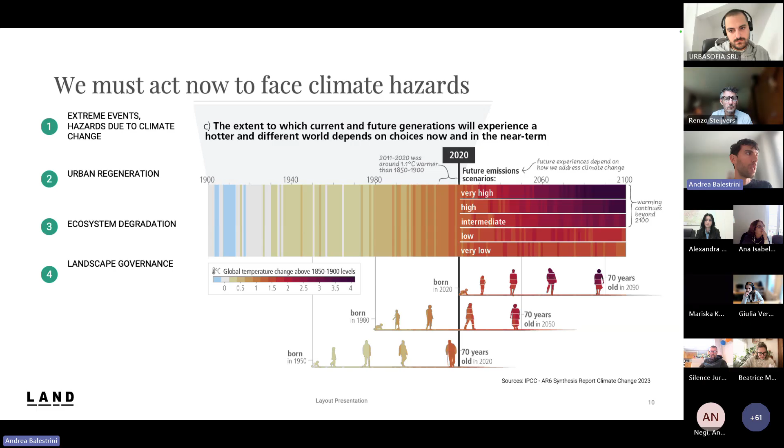It's also a cultural matter. We have seen in the past 5-10 years how society mobilized towards a greater awareness on climate change, on the need of taking action and reintroduce nature in our lives. This must be supported by policies, of course, otherwise it would be a weak positioning.

So, as I mentioned, the World Economic Forum already stressed this topic of nature positive cities and published some guidelines in order to rehabilitate nature in urban areas. However, these recommendations and these international policies must become regulations and local policies.

We know that at European level, the European Commission committed within the European Green Deal, also with other initiatives such as the New European Bauhaus, and within this framework also the, let's say, fight for the Nature Restoration Law that has now finally been approved last year and will require consequent actions in the next decades.

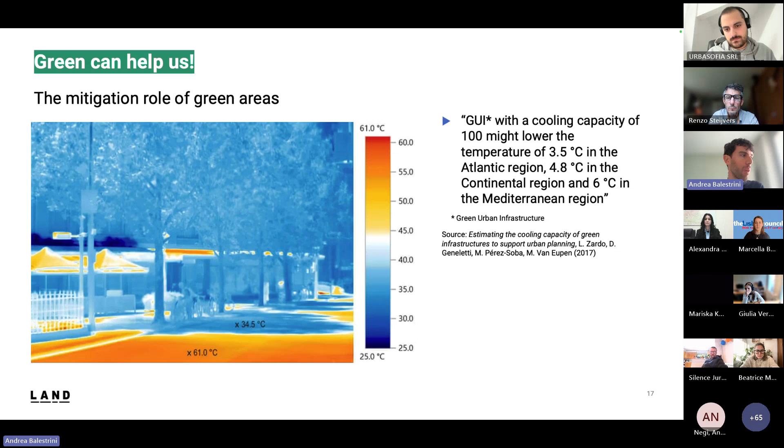Green can help us, it's a great ally in doing that, because several scientific studies, and I think this public is quite aware of them, have been demonstrating in the past 20 years how nature-based solutions, how green areas contribute to reducing temperature, improving urban drainage, improving air quality, and so on.

What is important to take into consideration is how the design process of nature-based solutions shall occur. So the starting point is the engagement of stakeholders and the assessment of the local environment, in order then to start a co-creation process, and then also a co-implementation, and finally a co-management.

So the participation of stakeholders is a key component in order to ensure efficient nature-based solutions, but also sustainable in terms of economic backing, in terms of maintenance, in terms of technical contribution by other partners in each context.

Also, the topic of monitoring is quite important, not only to contribute to building knowledge about nature-based solutions, but also in order to adapt the design, in order to control how the design and then the implemented design is working in the specific area of intervention.

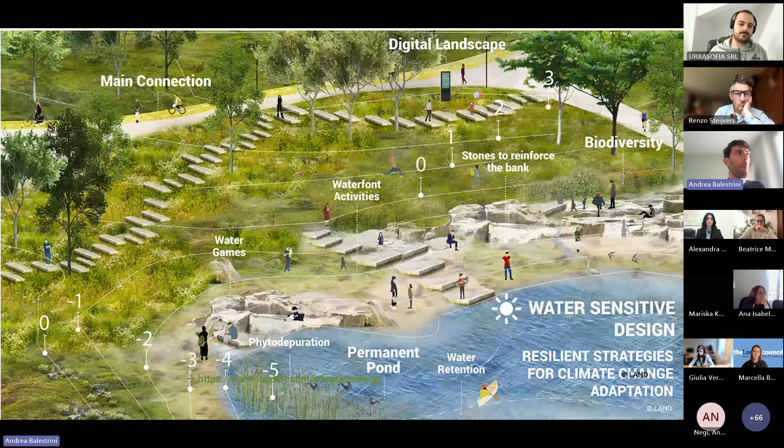Prototype in the sense that sometimes it is a good idea to start implementing small pilots in order to test them and then upscale and replicate them on a bigger scale. The monitoring is a great ally of prototyping, so that through the monitoring outcomes, the upscaling is quite more effective. And so then combine all the components in order to design multifunctional green areas and thriving ecosystems that are adapting to the challenges of climate change.

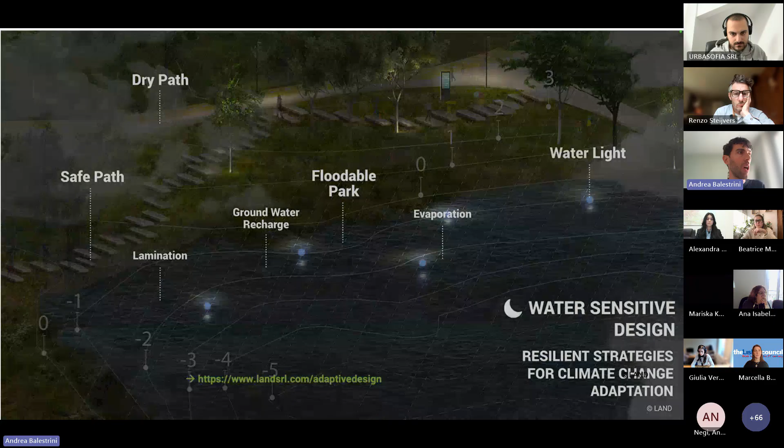Here are some examples in the projects that Land had the opportunity to develop in the last 35 years. For example, North Park in Milan was a quite extensive brownfield, and through several afforestation interventions and other, let's say, nature-based solutions ante litteram, we had the opportunity to turn this area into a metropolitan park, one of the most interesting peri-urban parks in the Italian context, or this former quarry in the Alpine valley of Valtellina that was turned into a new urban park, deploying several NBS such as ponds, afforestation actions, and draining paths.

Or again, on the Ligurian Riviera, a former railway that was turned into a bike lane with the linear park all along it.

Here we are in Germany, in the Ruhr area, one of the most important industrial basins in Europe. After the closure of heavy industry in the 90s, we had the opportunity between 2006 and 2012 to work on this huge project, turning the former dump and factory of ThyssenKrupp steel company into a new office headquarters and an urban park that is managing several issues such as rainwater and the excavation soils from the construction site. Here you see how, thanks to green areas, we were able to design some bioswales, some hills, some afforestation areas, playgrounds, everything connected into a quite systemic cycle.

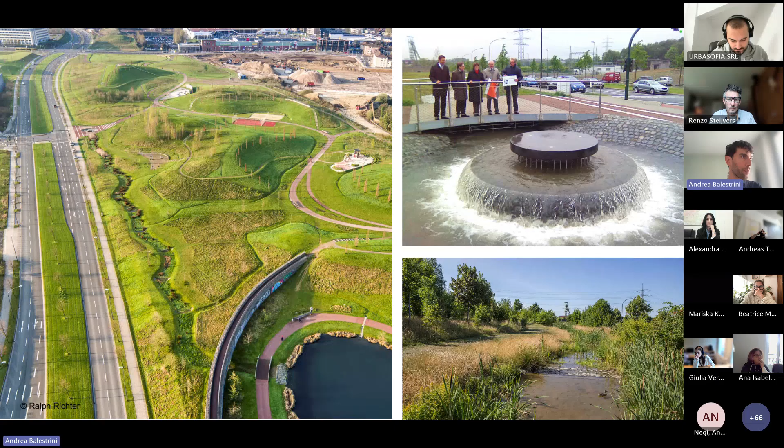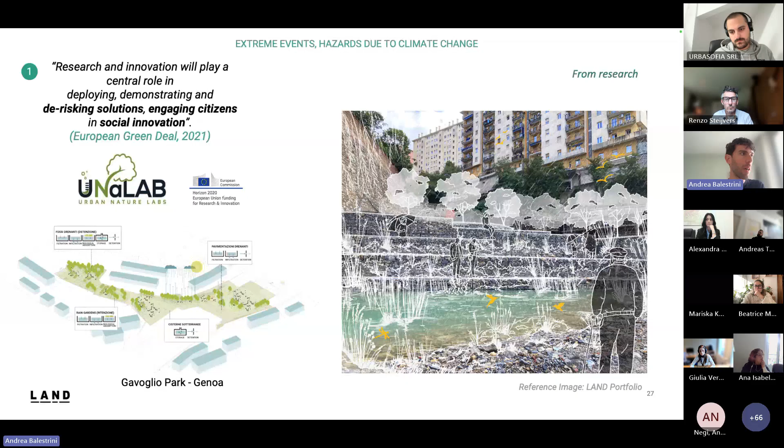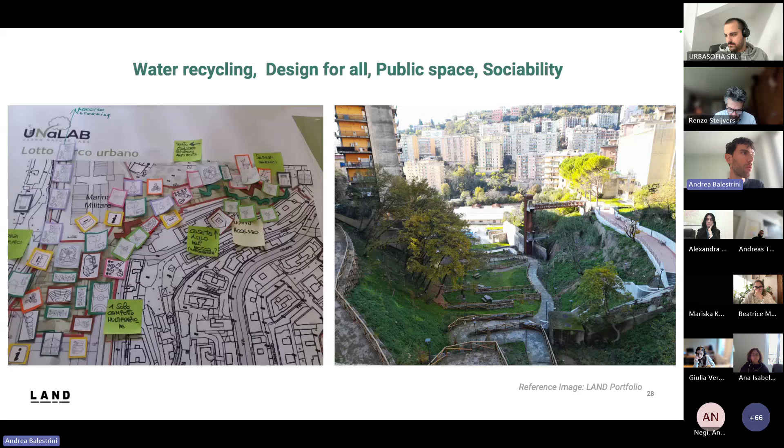In Genova, that is again in the region of Liguria, we had the opportunity to be partner of a Horizon Action from 2017 to 2022, UNALAB. Within UNALAB, we turned a 1.5 hectare former military barrack into an urban park. We demolished 5 buildings in the area, and we unsealed as much as possible. There was a co-creation process, and through the co-creation process, we were able to place functions that are vital for the neighborhood. And then, on the other hand, we had the challenges coming from the peculiarity of the site, so very steep, very sealed in general, with a lot of rocks underneath. But the final result was a first attempt also to introduce a nature-based solution in such a harsh Mediterranean context.

Another project is in the metropolitan area of Milan, in the northern part of it, that is one of the most urbanized areas in Italy, suffering severe flooding when there are heavy rain events. And here, working together with the local water facility, we were able to turn the initial project of a contention basin made of concrete into an urban park, almost avoiding the use of concrete and other artificial materials. So in this case, you see it's a depression that is collecting rainwater. It can be used as an urban park when it's not raining, and when it's raining, it becomes a huge pond.

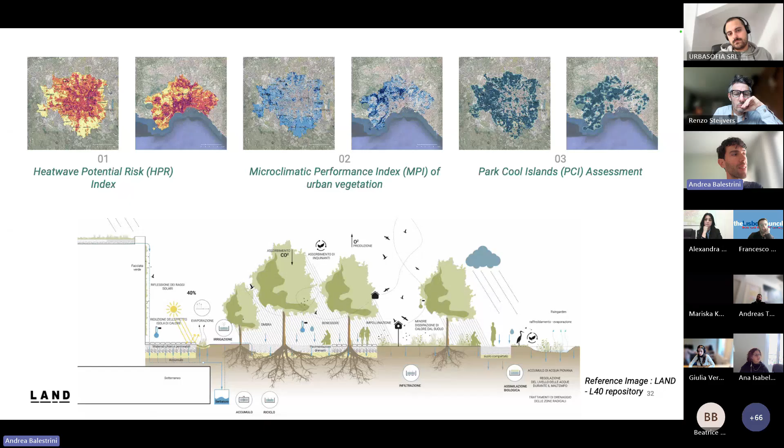Another European action where we were able to improve the knowledge of the benefits of nature-based solutions was Urbalytics, that was funded by the AI for Copernicus Horizon project. We partnered with Latitudo 40, and we developed a methodology to assess urban climate risk through the analysis of Copernicus satellite images. You see the results on the top of the slide. So there are three main outputs that are tools in order to assess the heatwave potential risk, the microclimatic performance index, and the Park-Cool Island assessment. And this was intended to assess which nature-based solutions were able to improve the conditions in two pilot areas in Milan and Naples, so two very different climates and urban situations.

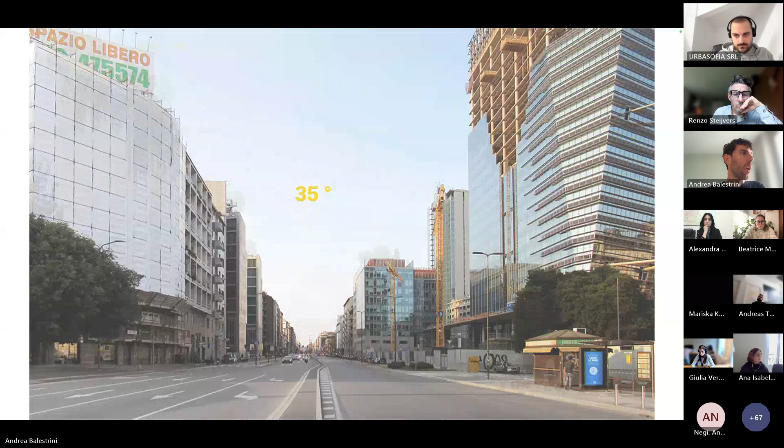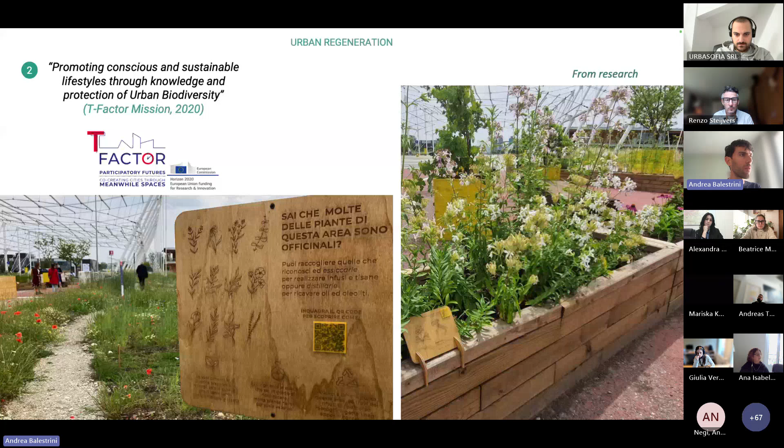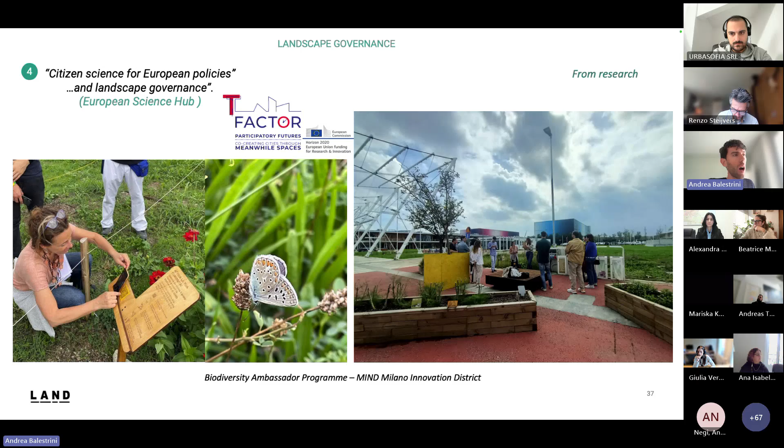So nature-based solutions can also be a great intervention at small scale. We had experience of that within another Horizon 2020 project called T-Factor that worked on meanwhile spaces. Again, in Milan, we were able in a very wide urban regeneration area to introduce nature-based solutions as a booster for a dialogue with different institutions and to involve external stakeholders that were not included in the urban regeneration projects, such as schools. Here we realized very tiny solutions, so basically some planters and some natural meadows with a QR code that informed the participants, but also the employees of the companies already established in the area, how local biodiversity had an impact on their everyday life.

So this was also an attempt to introduce citizen science into the monitoring of nature-based solutions. And together with Politecnico di Milano, we developed a quite interesting website within the project website where we published a bestiarium and herbarium, two catalogs of herbs and animals that are living in the area.

The role of non-humans or more than humans is very important in the design of NBS. This is something that came out in the last 5 years rather than when NBS were first conceived in 2015. In several projects, the partners are really pushing for including animals and other more-than-human characters into the design and the implementation of green areas.

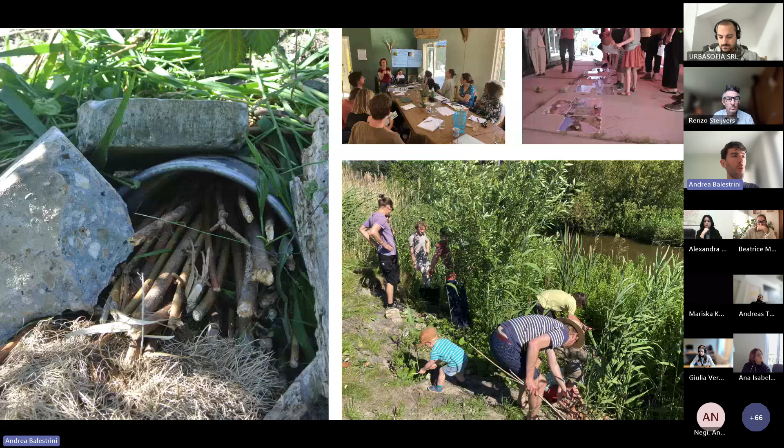Here you see some examples of how we developed some animal-oriented solutions in a park in Amsterdam. They are very tiny interventions that, however, were able to engage also some citizens in the making. And this is the final result, how in the urban regeneration area tiny prototypes can then become established and long-lasting solutions.

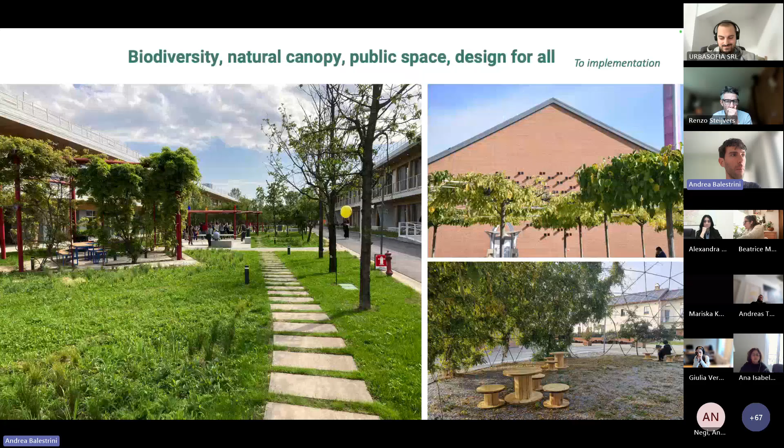Unsealing is another very important topic for European cities where we can orient towards nature-based solutions. This is another case study in Italy, in the city of Vercelli, in the north of Italy, not far from Turin. You see there was this very long alley in the center of the city with many trees. However, they were all belonging to the same species. They are ulmus, and most of the surface was sealed, with several inconveniences during summer or during heavy rain episodes.

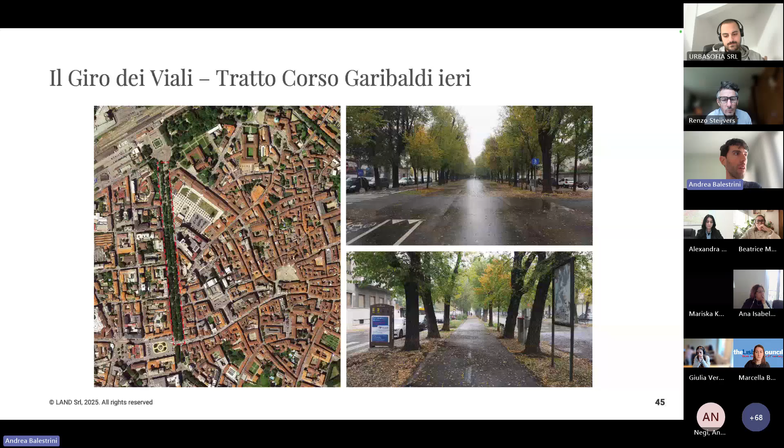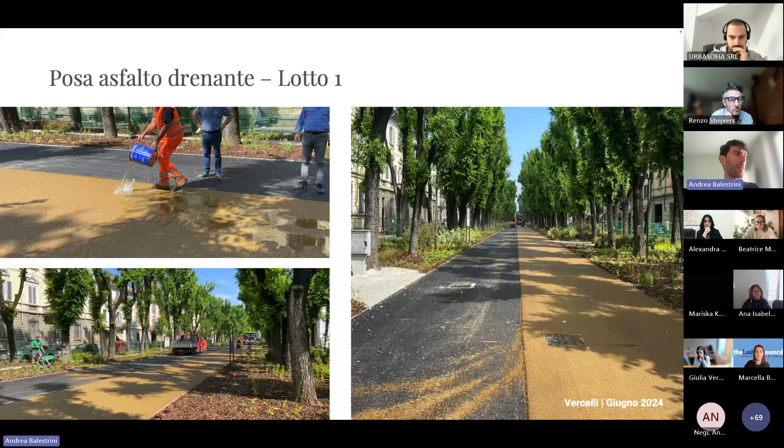Here we established a fruitful dialogue with the local public administration, and we managed to propose a design based on green instead of asphalt. So the asphalt surface has been reduced and a draining pavement has been established in replacement of that. On the other hand, new trees with more species have been planted, and also shrubs and herbs, in order to improve biodiversity and draining conditions.

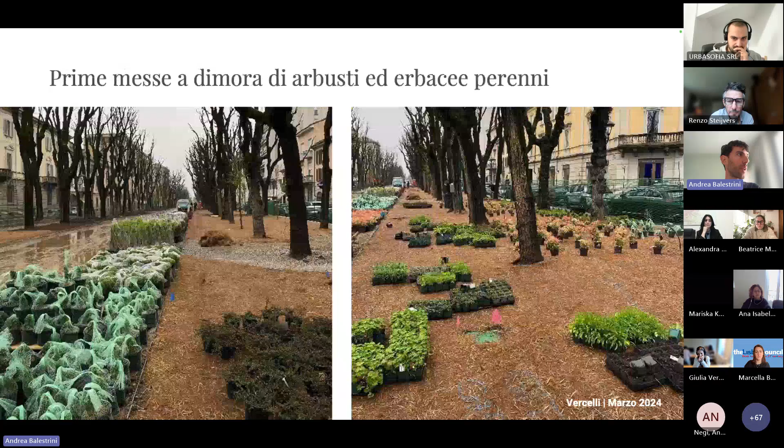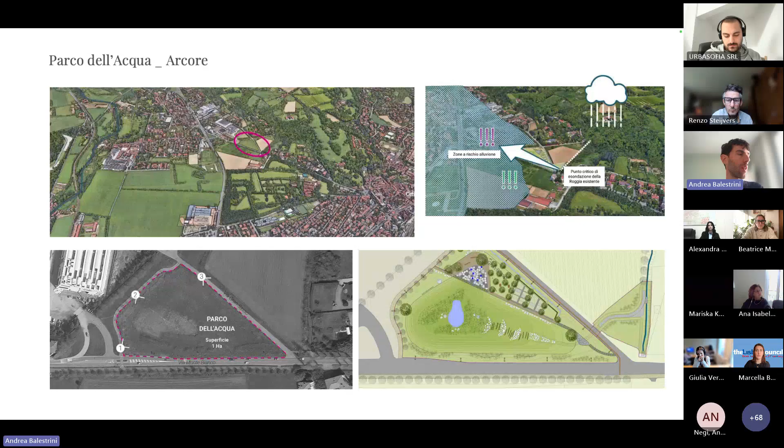And finally, I will talk to you about the pilot that we are developing within the GreenInCities project. There will be also another partner, Jose Miguel, that will talk in this panel. We are in the city of Prato, in Tuscany, a quite dense urban core and a very scattered urban fabric all around with several industrial and residential neighborhoods. Through the tools that we improved within GreenInCities, we were able to run an assessment of climate challenges, of biodiversity and vulnerable groups in the city.

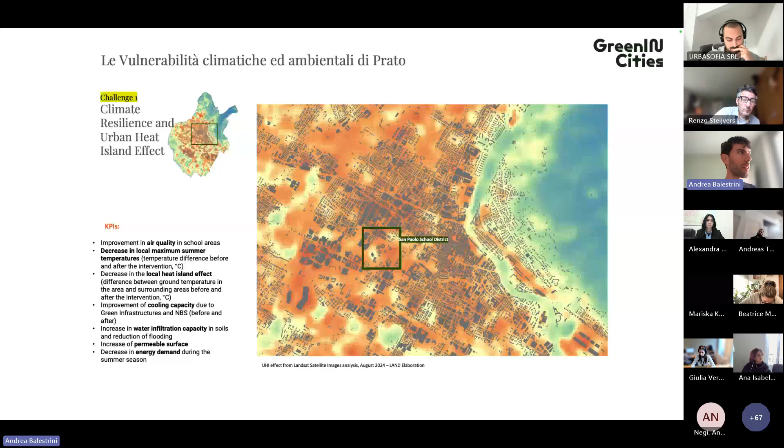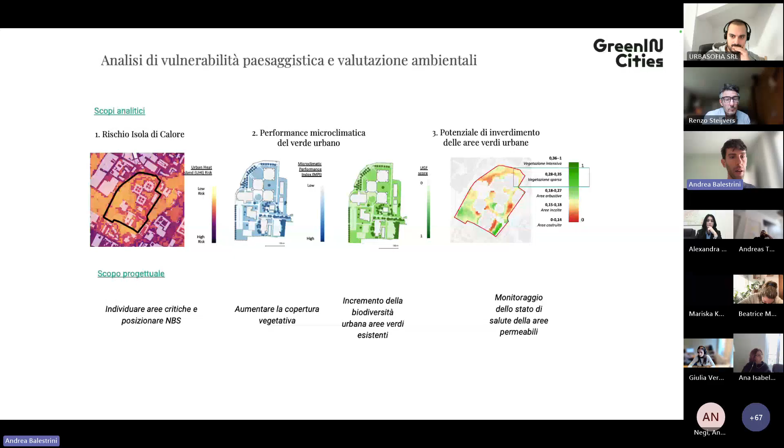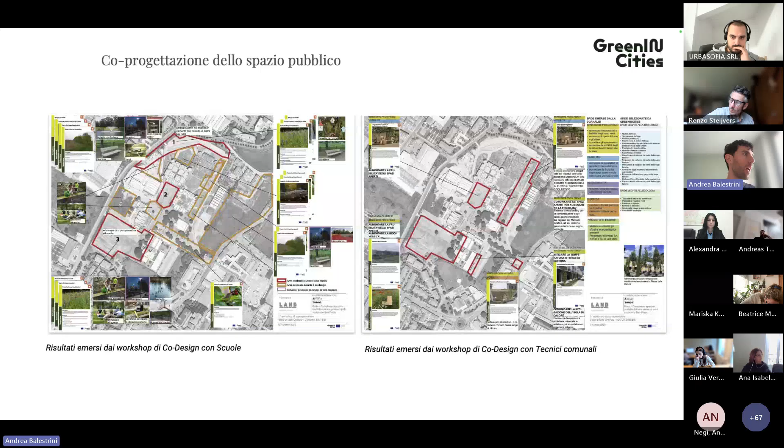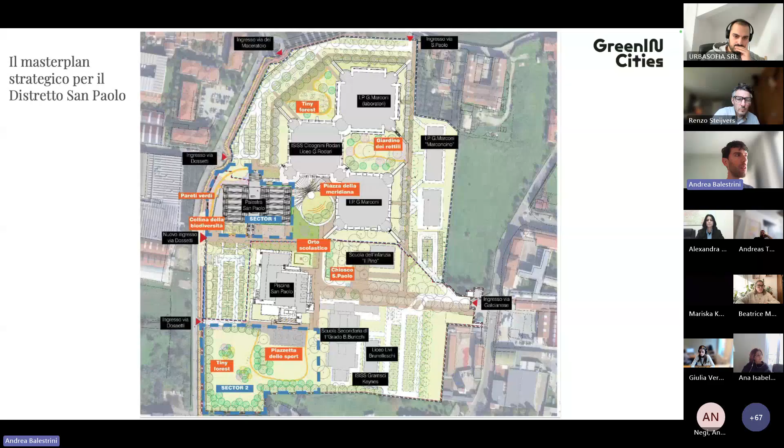And we identified with the local administration this school district called San Paolo, where most of the challenges are more significant. Here you see the same tools applied at local level in order to identify which are the areas that are more vulnerable and which are the components that we must address in the landscape design. We did a co-analysis and co-design process with the pupils in the schools and the teachers. And the outcome of the co-creation was this master plan for the entire school compound, where we focus on two specific lots of intervention, the blue ones, that are currently under design.

We are expected to deliver the technical design at the end of the month, so that in springtime the construction will start. In general, just to give you an overview of the nature-based solutions introduced, we are working on flower meadows for pollinators. We are improving the condition of an existing sport building that has just been realized. However, in the hill next to it and the green areas all around, there is just grass at the moment. So the idea is to improve the tree canopy and also to work on green facades.

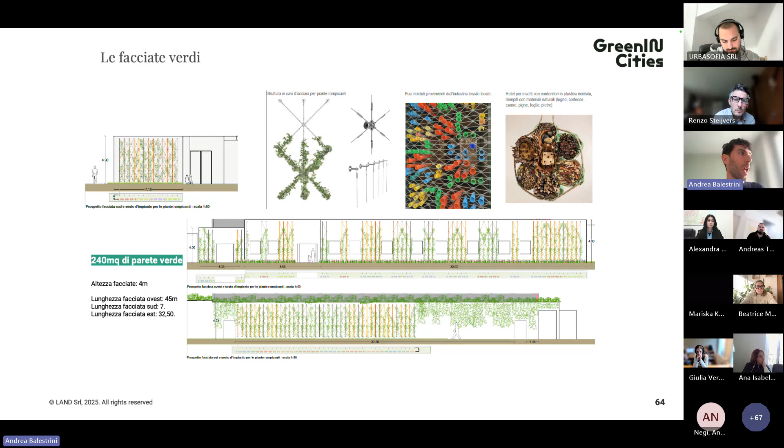However, we are not working with technological facades, instead with ground-based facades, including some reused materials from the textile industry to create opportunities for insects and other small fauna to nest and to feed. These green walls will also mitigate the quite rough concrete walls of the sports center, and will be combined with the other lot where we will design some tiny forests and some wild buffer zones in order to improve the green corridors existing in the area.

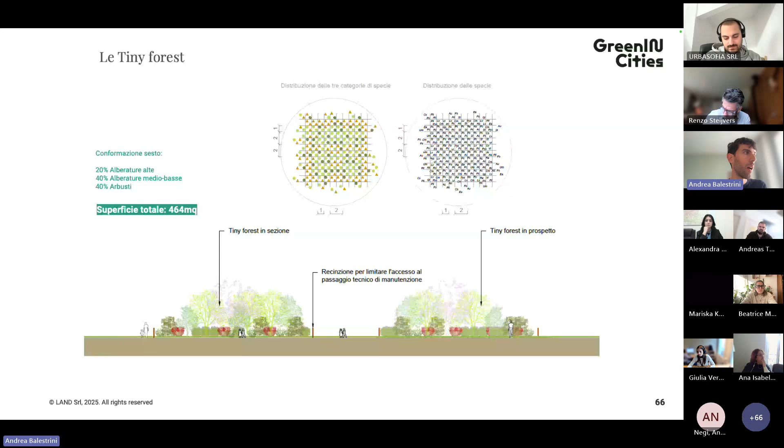We have been in touch with another Italian university, that is La Sapienza in Rome, because they have developed other tiny forests in Mediterranean contexts in Italy. So we are able to adapt this concept that is coming from the Miyawaki method from Japan also to our climate. And of course, our main concern at the moment is how we are addressing the needs of more than humans in our interventions. We are working quite deeply in the project in order to have them included in the design.

That's all. I just wanted to close with this picture of an installation we did for the Triennale in Milan, which I think somehow recalls the name of URBREATH, because here it was "let's break it up in order to breathe." And so I leave you with this image.

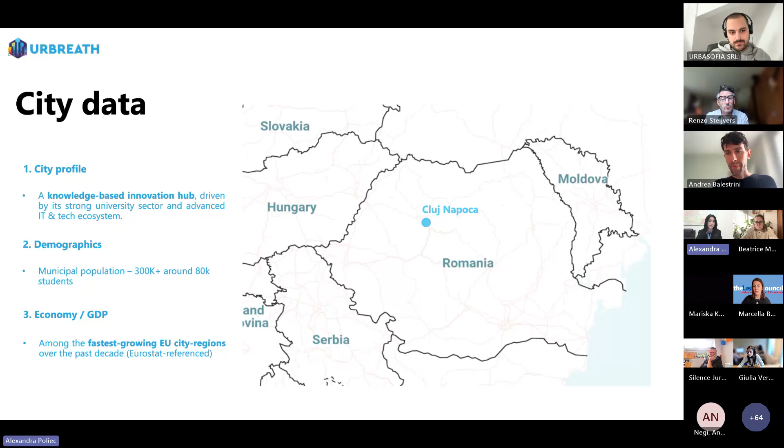Cluj-Napoca has over 300,000 residents and more than 80,000 students. It's one of the fastest growing city regions in the European Union, and it's known for its strong knowledge base and innovative tech ecosystem. Our city is in a valley between the hills. The Someș River is our main ecological axis, with several green patches and transversal corridors linking the river to the forest, to the towns and other natural areas.

Our vision is to be green, digital, and resilient, and for that we work really hard. For all the work that we do, we were among the first 10 cities in the EU to be awarded the EU Mission Label, under the 100 climate neutral and smart cities initiative. Our international competitions have become a key tool for delivering high-quality spaces in Cluj-Napoca. They ensure transparency, strong participation, and most importantly, the best idea wins, not the cheapest offer, in line with the national public procurement rules.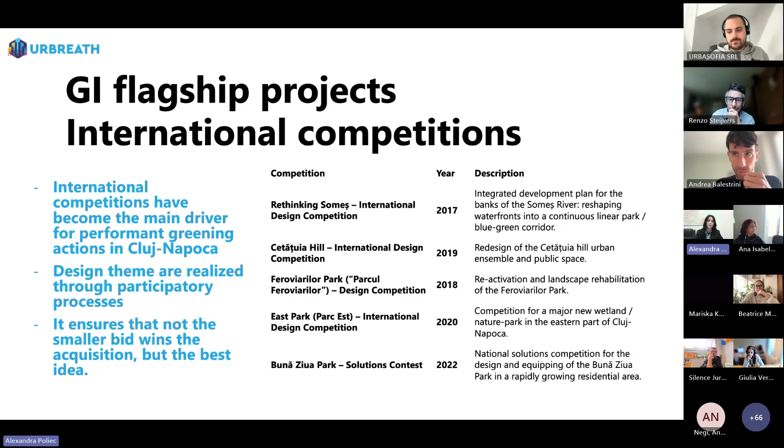One of the best examples is the Rethinking Someș project, which recently won the gold prize at the Madrid Architecture Awards 2025. The concept focuses on turning the city back toward the river and creating high-quality public and ecological spaces along the water. Another great example is the Feroviarilor Park. It complements the investment in multifunctional green spaces and strengthens the green-blue corridor along the Someș River. It shows how large green spaces can reconnect communities and improve ecological continuity. Here you can also find examples of nature-based solutions such as rainwater management and many others. Here are some pictures.

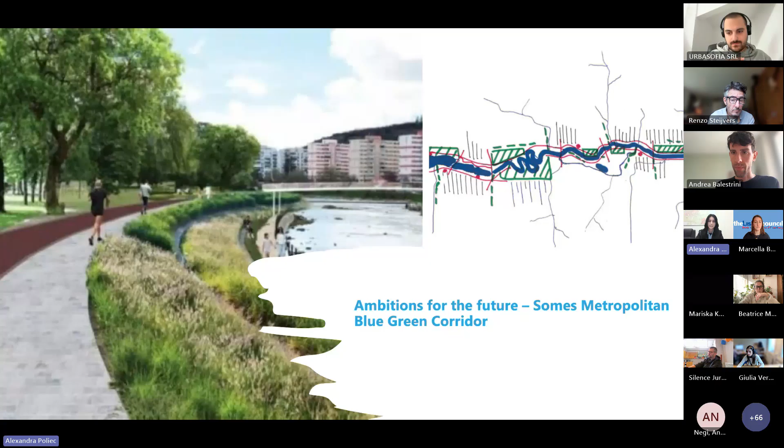Our long-term ambition is to develop a metropolitan blue-green corridor along the entire Someș River. The vision integrates nature-based solutions, flood mitigation, biodiversity restoration, and accessibility to public spaces at the metropolitan scale. We also have a big project, the East Park, one of the largest green infrastructure projects in the city. It covers over 45 hectares of wetlands, lakes, and former nursery land. The project aims to protect biodiversity while creating accessible and recreational spaces.

Another project is the Primăverii Park. It's a neighborhood scale investment in Mănăștur. The park is being expanded and modernized. The redesign includes new trees, green areas, urban furniture, and improved mobility access. It's a clear example of how small parks can greatly improve the quality of life locally.

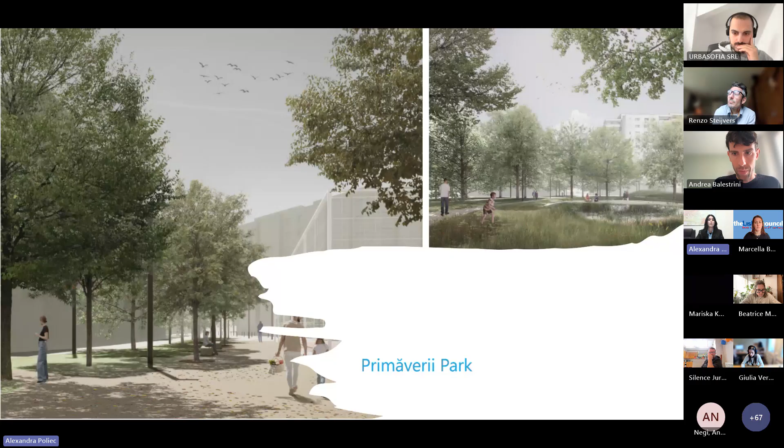And beside all of these major projects, small-scale actions are equally important. They address local needs, are quicker to implement, and often rely on participation or partnership. They also help maintain everyday green quality across the city. Some examples include the Adopt a Green Space program, active since 2012, the former Tree for Every Newborn initiative, and also what we do right now in the URBREATH journey, which transforms degraded microsites using a small budget but strong community involvement. Codruț, the floor is yours.

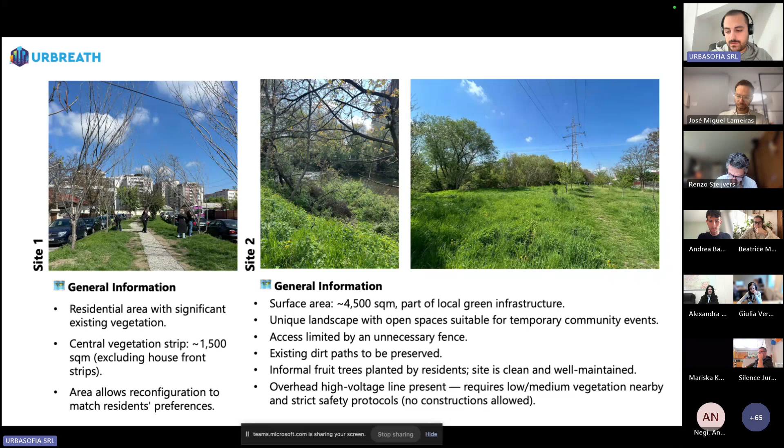And site 4 is near the river, but across the river bank, which is a steep slope which resulted from the systematization of the river and the flood protection measures that were taken back when the city developed some years ago.

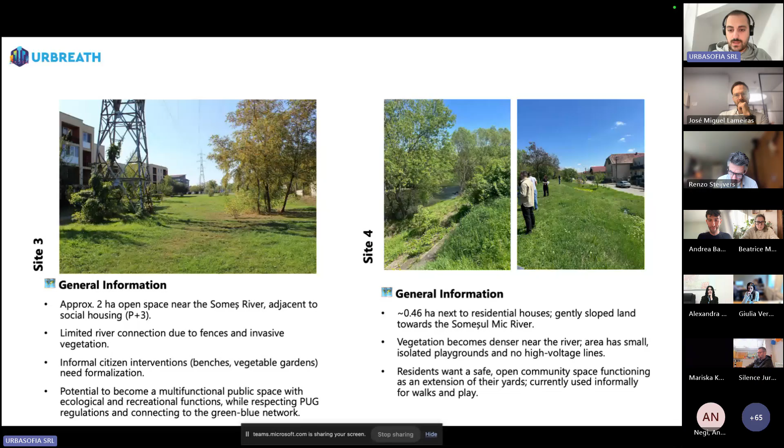So how do we start? In January 2025 with consultation sessions and workshops. We had in January two discussions in the two neighborhoods, Iris neighborhood and Someșa neighborhood, with all types of actors, residents, NGOs, as you see here, for part of our consultation.

And it is very funny that this dog was present because we found out that actually animals are relevant actors in the area, that beavers are making a comeback in the city landscape in this corridor. So we realized more than before that the Someș River and our sites also act as an ecological corridor, and it's very relevant how we interact with this space and this landscape.

Furthermore, in April, we organized a two-week workshop with a group of volunteers and students from the agricultural faculty from the local university with the landscape department. We had spontaneous discussions with the residents. We did the site analysis, we did observations, we did thermal mapping, and with all of this information, we worked very closely with the students in order to develop conceptual plans, concept ideas.

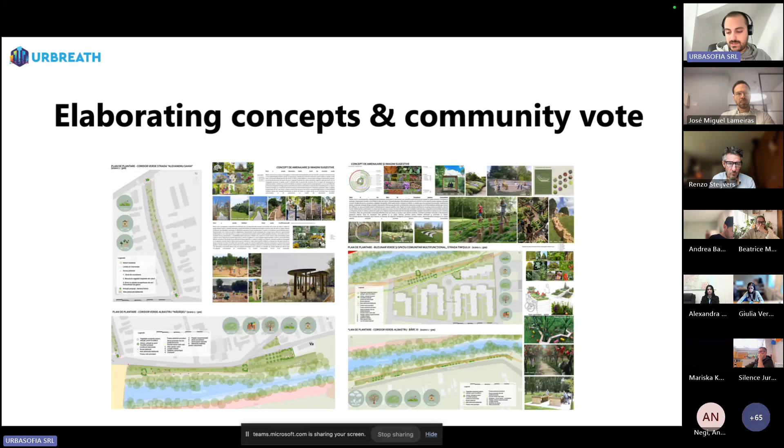And there were three teams elaborating ideas for each of the four sites. So we had 12 solutions in the end, and these solutions were put to a vote by the community. They were displayed in a public area, in Armatura Park, and then also in a different area.

I don't remember now, Alexandra, the second display, where was it?

However, we gathered more than 300 votes. And with the winning team, we started over summer 2025 to work with them on the technical design plans. So we did this process to be a sort of mutual learning process, and we consider the students that work with us a very core group of people that we want to involve also in future actions.

It would maybe be easier just to take their ideas and do the technical design plans by ourselves, but we took the opportunity of working together, and they had a lot to learn about how to deal with a real project because they were still students, 3rd year or 4th year, or even younger. And we also did a lot of learning ourselves because they know the city quite well. Some of the students actually live in the area, and we had a back and forth of ideas and technical requirements and our constraints, which were financial, to deliver the final plans.

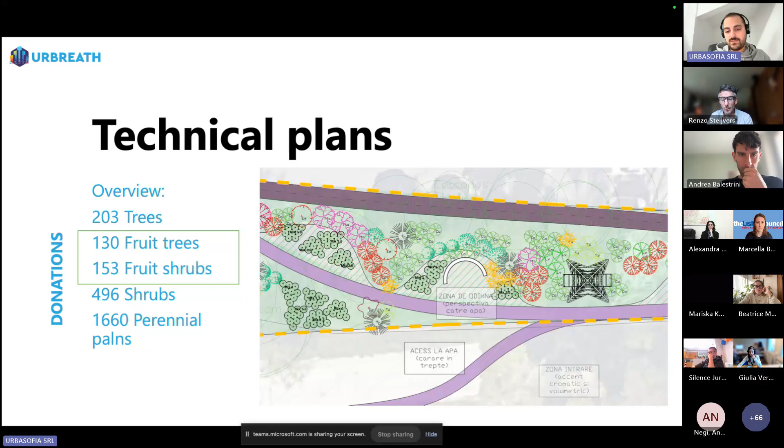And these are the list of quantities, to put it simply: 203 trees, fruit trees, fruit shrubs, a lot of shrubs and perennial plants, because like I said, the height of the vegetation is under constraint because of the electrical line.

The Site 1 transformation vision is somewhere along these lines, to act as a green buffer with dense vegetation, a sort of microforest. We also dabbled a bit with the Miyawaki idea, like Andrea presented before, but not quite, because the morphology of the terrain doesn't allow it. But we want to bring taller vegetation here because it's one of the few sites that allow taller vegetation, alongside pollinator-friendly vegetation in these shrubs and grasses, which helps to create separation between the traffic lanes and the pedestrians.

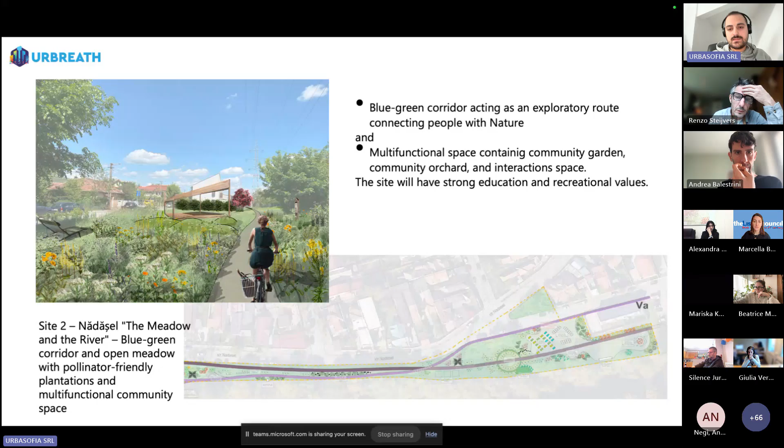The second site acts more as an exploratory route and a multifunctional public space with areas with strong natural ambiances and also places for a community garden and community orchard. The third area is a more multifunctional space. As you see here in this plan, I don't know if you see it very well, we kept the openness of the site alive. It's one of the main features of this meadow.

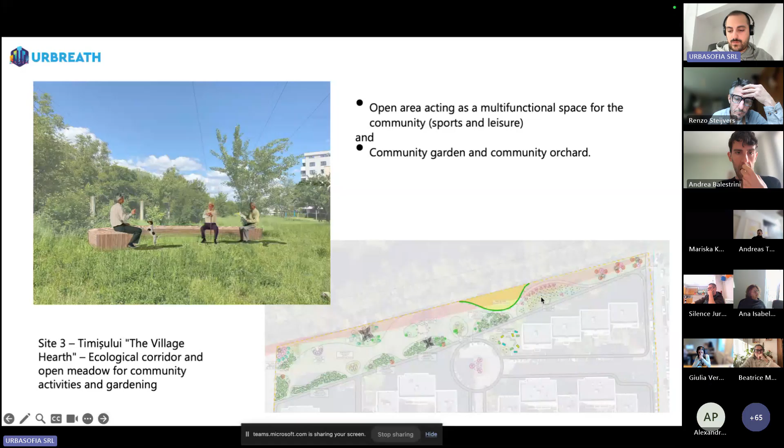And we activated some areas with pollinator-friendly plantations and perennial plants in order to bring color, to support biodiversity, and improve the local landscape. And as community activities, we allow for interaction spaces, open area for sports, but also community orchards and community gardens, like two small areas here.

And the fourth one becomes this green corridor, this sloped terrain, an area for play and socializing, but we also bring here some tall vegetation where we can, in order to complete the canopy that appears on the other side of the riverbank to have continuity, and also fruit trees.

It was a very nice event with huge participation, and we think that it's a good starting point to bring value to the space before we start implementing. And in terms of URBREATH, there are many technical elements and digital elements that we will pilot through this project, like participation and sensors. We installed the air quality sensors in the proximity of the sites and different urbanistic analysis.

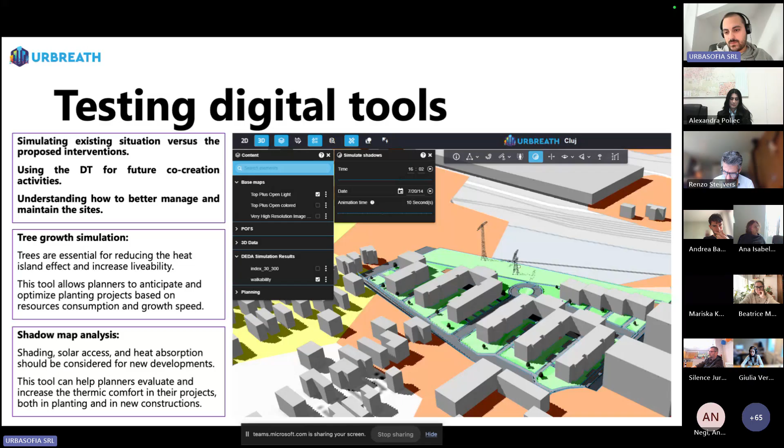I put here only an extract of the digital tools of the digital twin, because we believe it can make a relevant case of analyzing the existing situation and the proposed situation. So with the proposed vegetation, to make some simulation of the tree growth, of the shadow map analysis, maybe also in the future of the water requirements, in order to better understand how to manage the sites, and also to improve participatory processes, showcasing the residents how the site will become before we start implementing and show how it will evolve. Yeah, and I think that that is all from us.

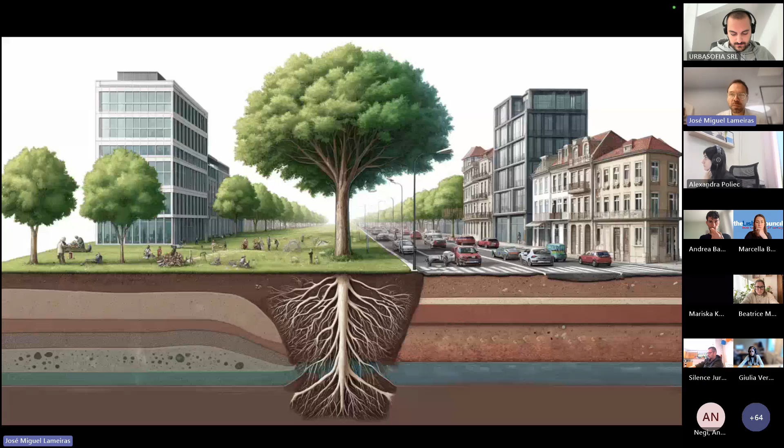Most people don't know that the biggest reservoir of drinkable water are not the lakes, are not the rivers, it's the ground. The ground stores the water that we need to live, but most importantly, it also stores the water that the trees need to evapotranspirate and to effectively cool down the city. It's very important that we think of a tree, that we understand what is a tree, and that most part of the tree is what's hidden. And we also know that in the cities, whenever it rains, most of the water in the permeable areas goes and recharges the water tables.

One of my biggest advocacy in the last years is to actually make sure that our cities have healthy water tables. The water tables in the city of Porto, they're lowering at an alarming rate of 1 meter per year. This means that the city is getting more impervious, and because the city is getting more impervious, the water tables are getting lower, and the water is not going up through capillarity, it's not reaching the roots, and it's not being evapotranspirated into the air.

And it's this evapotranspiration of water that creates this thin layer of moisture that can actually act as a thermal inertia and effectively cools down the city. This is the reason why in many European cities, and I speak in particular of Coimbra and Barcelona, you now have areas of the city that have trees where the thermal behavior is the same as pavement.

This is extremely alarming, because if the trees don't have enough water, the trees are extremely smart, they close their stomata and they protect themselves. And they protect themselves by closing the stomata and not evapotranspirating. And if they don't evapotranspirate, they don't cool down the city.

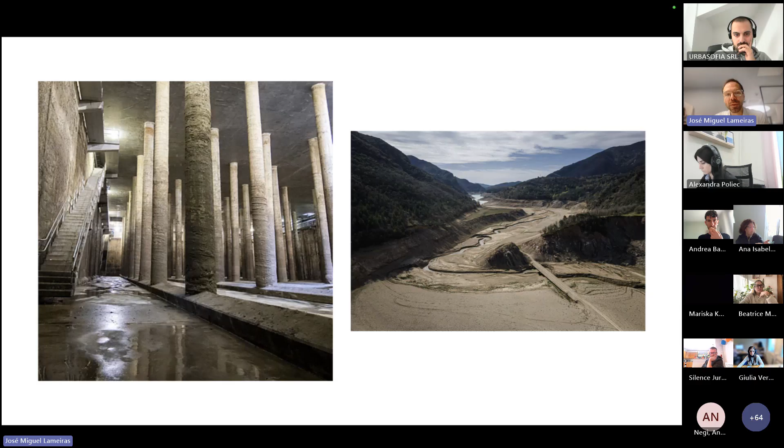and the lakes and dams without water. But most concerningly, the part that I'm extremely concerned about is this: the urban parks that are getting dry, the trees that are still dying today because of low water tables, and what used to be meadows and lawns are turning into pavement because the soil without ground cover just erodes and quickly transitions into this pre-desert landscape.

These are the kind of solutions that we can implement where we guide the water on the surface, both by the paved areas and the green areas, towards water infiltration areas that basically act as a piston. They retain the water, they infiltrate the water, they push the water into the ground and they recharge the aquifers. This is extremely important. It's dependent on the geology. Porto sits on granites. It takes longer for the water to infiltrate, which means that we really need to do this to assure the resilience of the city.

This is a very important work that we did 15 years ago, where we mapped the green structure of the city. This allowed us to make a diagnostic on the areas that lacked green spaces, like the center of the city, the areas that had quite interesting green structure, and we also thought about how to make connections, how to make linkages, and how to link society and urban design with green spaces.

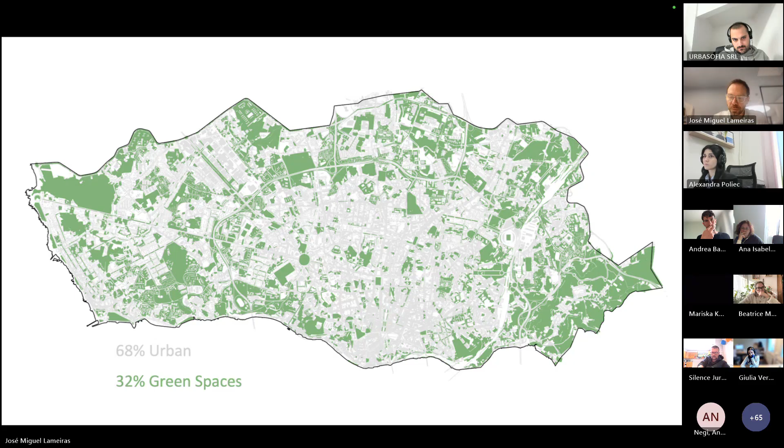This would be the map of the city. And yes, 24% of the city are buildings, 32% are urban green spaces, but look at the name and the number in the middle. 44% of the city is devoted to the car, roads, paved surfaces. Of course, we also have the sidewalk, but these are mainly parking spaces. Look how much area of the city we devote to the car.

This is also very important because Porto has a huge housing crisis. So we need to increase the percentage of buildings. It's needed. I'm totally in favor of that, but never at the cost of urban green spaces, always at the cost of this huge number of paved surfaces. Other cities are just like Porto. Porto is the product of its time, and of an urban design that promotes the car as a key structure for the city. But look, this is also the reason why Paris committed to removing 40% of the asphalt as a way to face the problems with the heat waves.

If you look at the city of Porto and you start data mining the 32% of urban green spaces, you can clearly see that 22% are private. This is a very important number. No true policy on protecting urban green spaces can be developed and implemented without involving the private owners. Only 10% are publicly owned. It's the same in most European areas.

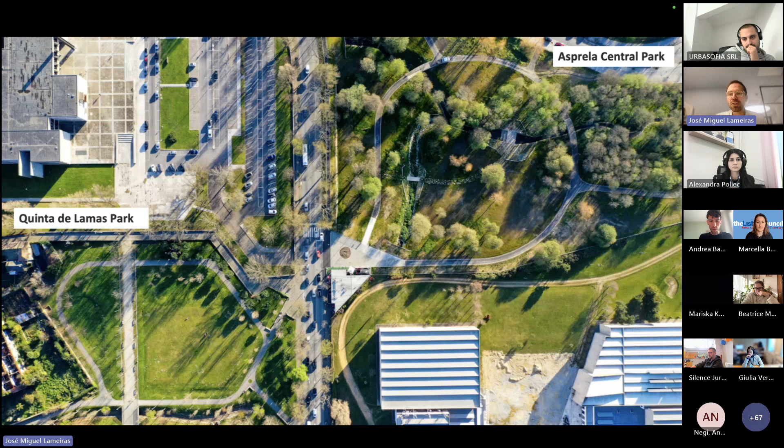These are the university campus. It's a project that has been developed by my dear colleague Paul Marx, I, and a large team. These are the two parks. One of them is 12 years old. The other one is 3 years old. And they have, as all of these green spaces, sad stories. This is our university campus. In here, you can see the building of the Faculty of Engineering, and on the lower part, sorry, there's some strange sound.

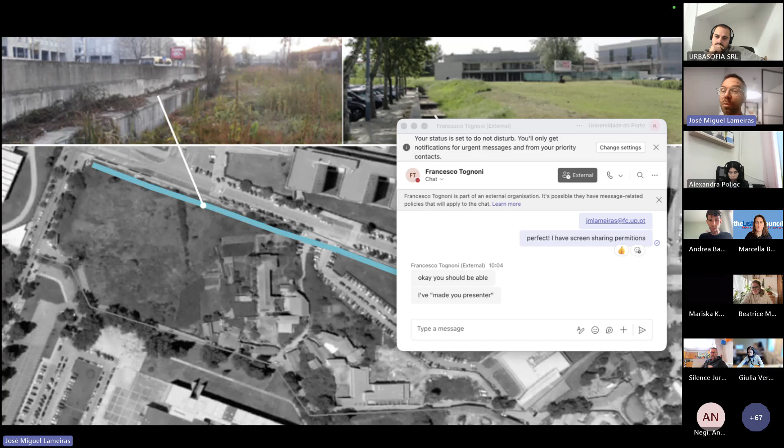Sorry, I'll move to another place. I'm actually in Manchester at university, and some alarm went off. We cannot hear you anymore. It's in the whole building. Can you hear me? Yeah, we hear you. It's an alarm that's set up in the whole building, there's no fire here. We didn't hear any noise. Sorry for this interruption. It's just an alarm that apparently sets off all the time. So I'm just going to resume, 3 more minutes. Can you hear me? Yes, we can. Okay, thank you so much.

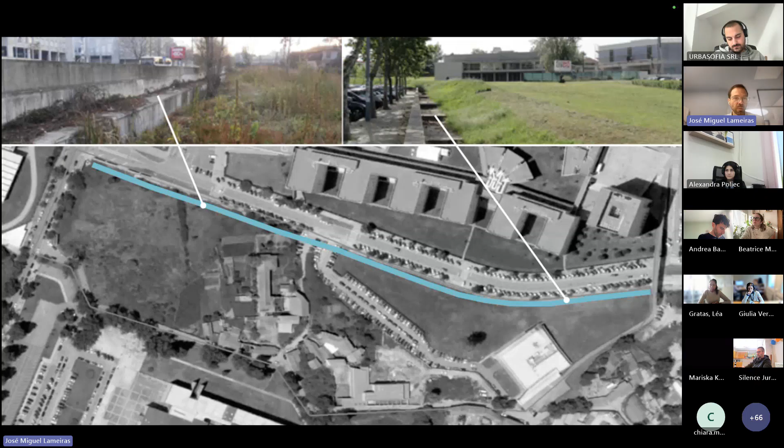So I was saying that when they built the Faculty of Engineering, they of course built it on top of a water course because it was the place that they selected. This is quite common. So they basically forced the water course into a tube and put it in here, and there was no connection between the different faculties. So what happened is that, as the large-scale watershed got more and more impervious, they had flooding constantly.

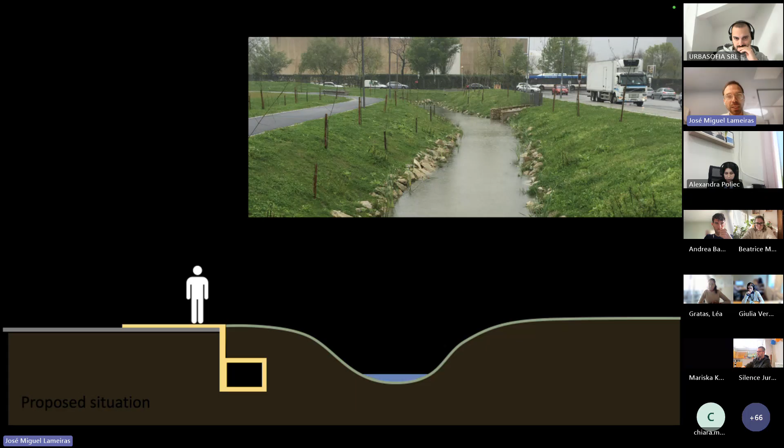So we were commissioned to daylight the watercourse. This was actually an alternative to the standard engineering solution, which is a larger pipe. Because there were floodings, the engineer said, let's put a larger pipe, and the landscape architect said, let's remove the pipe and let's make a park and let's flood a park. So basically, in the process, we created this wonderful park that connects the faculties.

I'm not going to speak about the social benefits, the ecological benefits. I'm going to speak mainly about how we devised and designed this as a large-scale infrastructure to protect the cities. Because if you flood the park, you protect the city.

So this is a park, a fantastic green structure, so that when it rains, 100% of the rain that falls on site is managed and infiltrated on site. Plus, it also receives water from other areas, and we have designed a set of water retention basins that connect between them. The water retention basins, they look like this. This is what you see. Kids love to play soccer in here because the ball rolls back into the middle.

But most importantly, what you don't see is that underneath we have about 70 centimeters of crushed stone and a permeable layer. This means that whenever it rains, most of the water goes and soaks and infiltrates into the ground. If we have a 20-year storm event, that very unlikely rain, that's high intensity, that only happens every 20 years, underneath this lawn, there is an added capacity of 70 centimeters, but then the water will start to accumulate on surface. So for the 50-year storm event, the water will circulate between the different water retention basins and will go to the water canal and fill in the water canal.

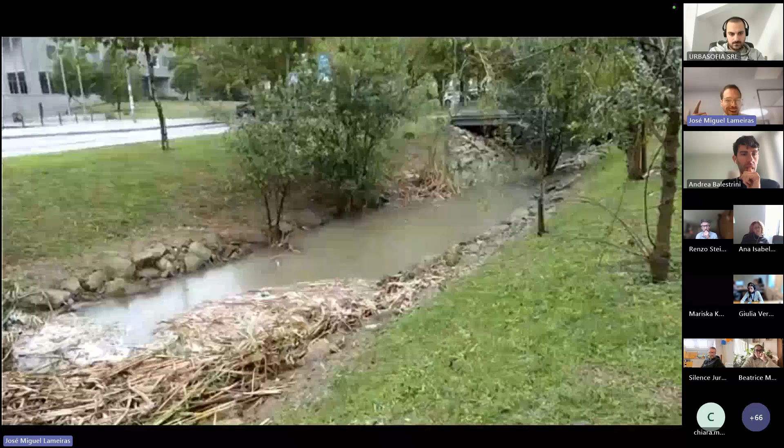So after this, we thought, okay, we had that extremely unlikely event. This is quite good. The park endured it. But 2022, it happened again. 2024, it happened again. 2025, it happened 2 times. The last of it last Friday. And the thing is that you may think, okay, but didn't he say that this is supposed to happen only once every 20 years? And he's already describing 5 times that this happened.

Yes, you're absolutely right. The thing is that all of the climate calculations are wrong. Why? Because they're based on historical data and they have not been updated to the new climate conditions. And that's why we're trying to force people to update the climate calculations, because the 20-year storm event is happening every year. So we have to be even more ambitious and go further and past the 100-year event, because the 100-year event is actually happening every 20 years or every 10 years.

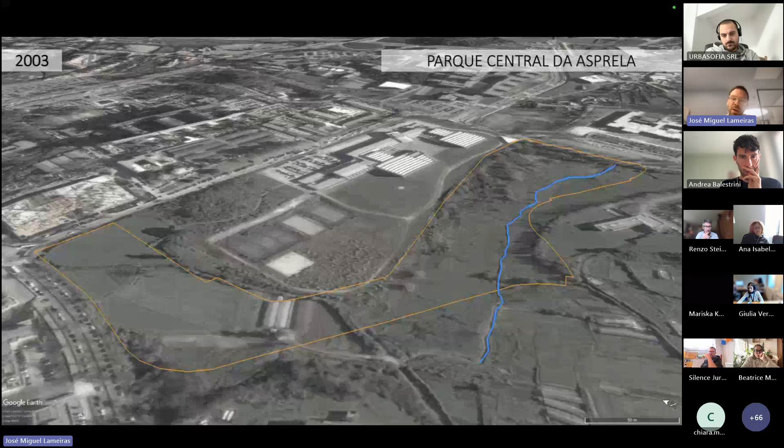The second park, and this is the last one, it's a little bit more ambitious. This is the continuation of the previous park. In 2003, 22 years ago, it looked like this. As you can see, there is a water course. If there was a huge rain, the water course would flood the agricultural playing fields, and that's okay. That's how nature is supposed to work. It actually fertilizes the fields. But look at the location of the water course. The metro line came, new buildings came, imperviousness came, urbanization came, and the water course was just moved from side to side to side to side.

Also pay close attention to one important detail, which is not a detail, which is that the metro line sits lower than the watercourse. And this was so badly planned that there was a risk that during a massive rainfall, the water would get inside the metro canal, thus creating about 30 million euros in property damage. So we were commissioned to find a way to protect the metro canal, thus avoiding this.

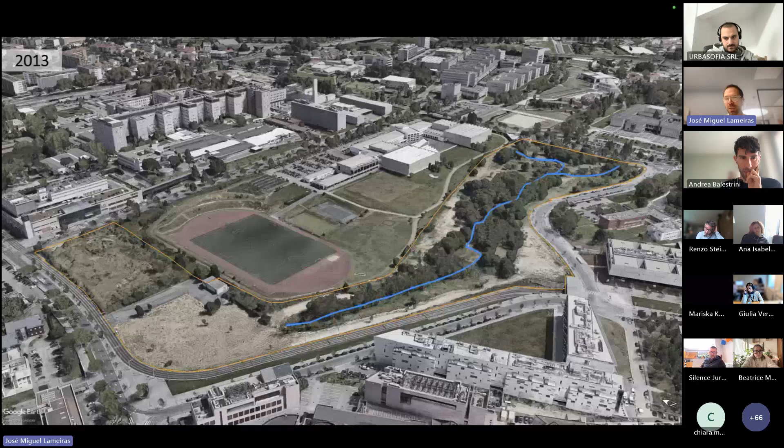So, of course, we did what we usually do, which is we made a wonderful park that is the most used park in Porto from a runners and cycling perspective, because it's close to where people live. It's a neighborhood park, but it also has a fantastic structure that looks at the watercourses. This is how the watercourses looked. Think how badly we have been treating the watercourses for decades. This is how the watercourse looked.

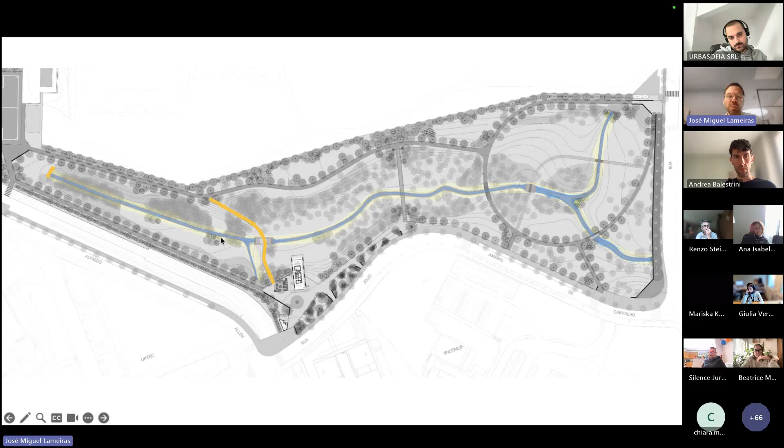So we designed a park which is wonderful. I'm not going to speak about the ecology and the social benefits, but I'm going to speak about this structure in here, which is a retention dam that allows for the park to be flooded. So the way this works, it works just like a sink. When the water comes, if it's a low amount of water, it just passes through. If it's an extreme rain event, it's such a large volume that it will start to fill in this area and to flood the park.

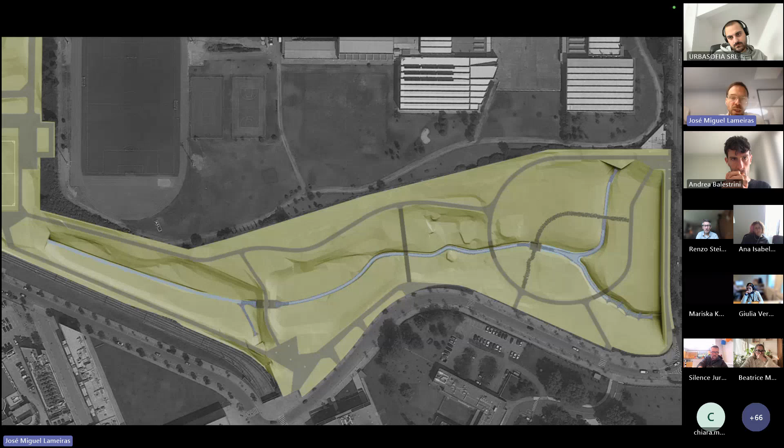This was made by topography, and the park is designed to be flooded with 2.63 meters. So a large volume of water, 10,000 cubic meters. 10,000 cubic meters is the volume of a 5-story tall building. It's a huge volume of water that will be retained on site, and it will be slowly put back into the system, but only the amount of water that the system can endure. The thing is that we went further than the 100-year storm event, and we have an added capacity of 2,000 cubic meters more in this region.

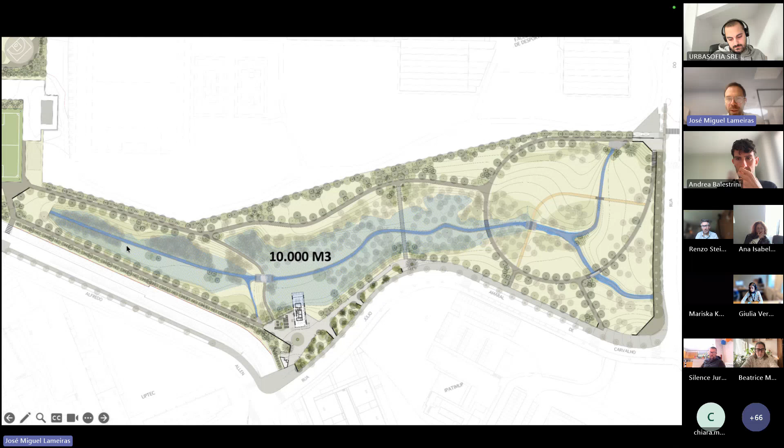The way this works is just like this. Most people that walk and run and cycle in the park don't realize this important infrastructure. But it works in the way that the water goes through. If it's a huge event, the park can be full of water, and then there is an overtop bypass that will flood the next part. So this is a system that we have designed to work only for the 100-year storm event. So we're flooding the park and we're protecting the metro. Look, you can clearly see that the metro line sits lower than the watercourse, quite common in an urban setting, but this is designed for an extremely unlikely event.

However, it already happened. 15 days before the opening, we had such a huge storm event that the park got flooded. There's a very funny story, which is that there was a news reporter that saw this, and he was going to write in the national press, look, there's a new park in Porto that has been so poorly built that it's already flooded.

And fortunately, the Minister of Environment heard about this, and he told the reporter, no, don't write that. This is actually meant to be flooded. And because it flooded, it actually demonstrated that it worked, and it protected the city, and it protected the oncology hospital. So it worked exactly how it was meant. This is an image from 2022.

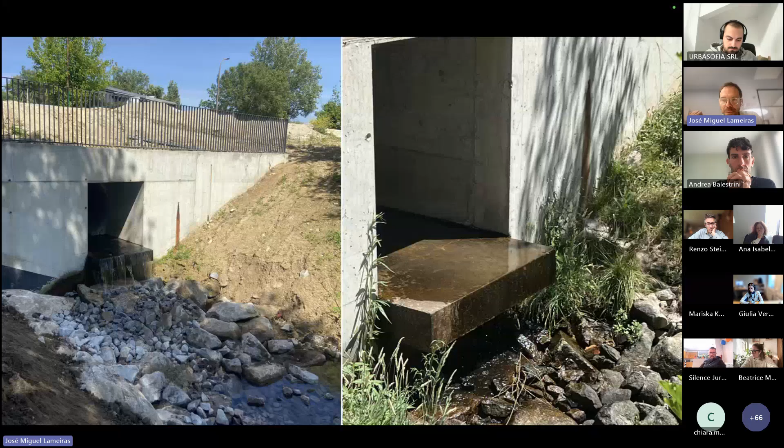The part that scares me the most, the part that I'm extremely concerned about, is what happened 3 months before these photos. You can see the park flooded with water. 3 months before we had this. Dry watercourses. Watercourses, they function based on the height of the water tables. And because the water tables keep on getting lower and lower and lower, for the first time in 100 years, these watercourses lost the water. And if watercourses lose the water, it's going to change the ecology of the watercourse, and it's going to change the ecology of the city.

So that's why, for me, I have been strongly advocating to make cities more permeable, and to make sure that we recharge the watercourses so we can sustain the ecology of the city and we can sustain the human life in the city. Thank you so much.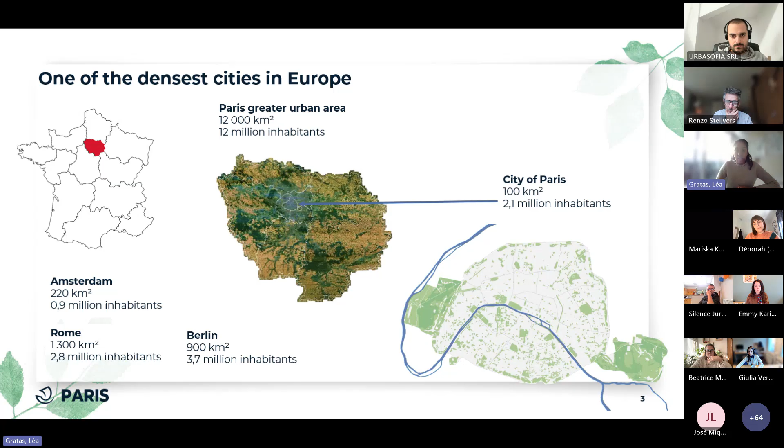So Paris is often associated with Haussmann's 19th century planning model and also with its iconic parks such as the Buttes Chaumont or Parc Monceau. But behind this historic image lies a major structural constraint. Paris is one of the densest cities in Europe, and as density increases, so do vulnerabilities, especially in the current context. Air pollution, noise exposure, intense heat waves, flooding risk, housing pressure, and aging population all converge and interact. And climate change amplifies each of these issues.

From a planning perspective, this means that we must rethink the city metabolism, its flows, its materials, its surfaces, and its ecological performance. This is exactly why, from the beginning of her mandate, the Mayor of Paris made climate adaptation a strategic priority. The city goals for the current term cover essential dimensions: climate adaptation, biodiversity protection, improved daily living conditions, access to nature, social and environmental justice, stronger ecosystem services, and better environmental health.

To coordinate these objectives, Paris relies on several strategies, but the backbone, the plan that structures all the other plans, is the climate plan. Its ambition is operational. So its ambition is to accelerate action, bring solutions closer to residents, and ensure fairness. And its first priority is clear: to protect the population from climate impacts. So this means rethinking urban design at every scale, from a street section to major public spaces, through greening, cooling, and climate responsive planning. And all these transformations are under construction, and some of them are already delivered.

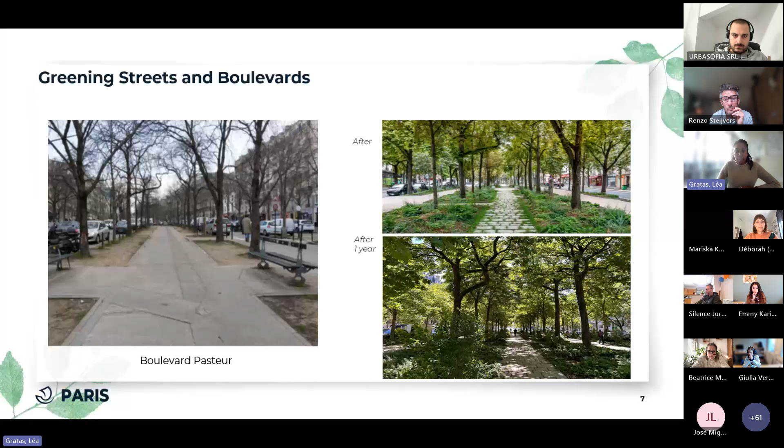So let me show you some examples. We are redesigning our traditional boulevards to incorporate vegetation, permeable surfaces, and thermal comfort strategies. We are creating urban forests on emblematic squares. They are not forests in an ecological sense, but they work as micro-habitats for fauna and flora. They increase shade, reduce heat, improve pedestrian comfort, and demonstrate that greening can also be integrated even in constrained spaces. And today, resident feedback confirms their value.

Another key project type is the Oasis schoolyards. Paris is systematically greening schoolyards to improve thermal comfort and resilience to heat waves. And also it has an educational part to connect children with nature a little bit more. We also transform the surroundings of schools, reducing car traffic, introducing vegetation to create school streets, and also to have a safer and healthier environment for all.

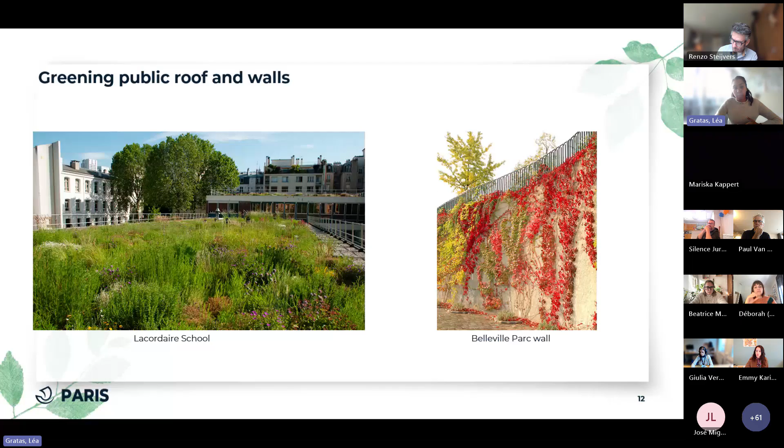At the neighborhood scale, we have implemented the Embellish Your Neighborhood initiative that brings a participatory engineering dimension. That is to say, residents can express their needs, identify opportunities, and the city can prioritize its interventions. And this approach responds to a growing demand for a greener environment. And at a city level, we also act on the built environment wherever technically possible. So we have a strategy of greening roofs and facades of public buildings.

And so to go further and to limit biodiversity erosion, Paris has adopted its third biodiversity plan. It goes further than the previous edition with more than 70 indicators, ecological priority areas, and numerous local actions.

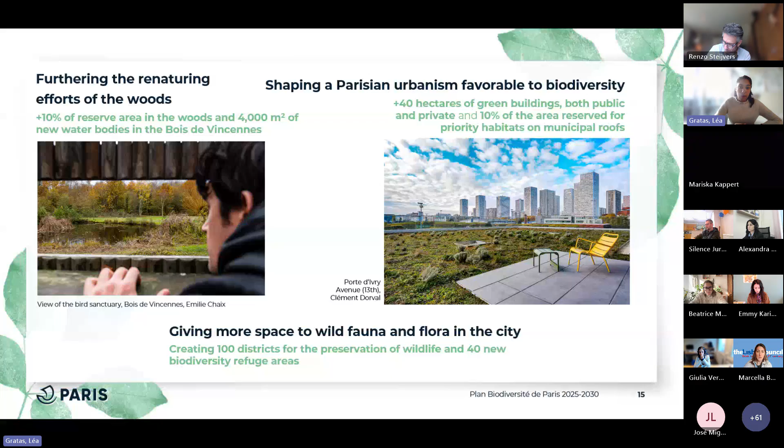Key measures of this plan include restoring hedges across the city as part of a broadened urban greening, also supporting outdoor education initiatives to reconnect children to nature. We also want to rewild major parks and forests, and also to promote biodiversity-oriented design.

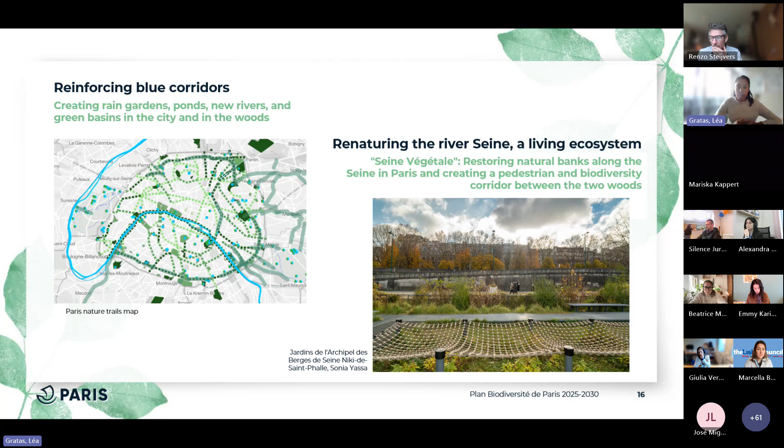And so the biodiversity plan not only focuses on the green network, but also on consolidating the blue networks, meaning water ecosystems throughout Paris. And a major priority now is the restoration of the riverbanks of the Seine.

So our major urban planning tool, which is the local urban master plan, also includes a bioclimatic approach. And this plan makes it possible to require the creation of green spaces on private lands in Paris. And it also ensures protection and coherence in ecological continuity, particularly through the enhancement of the green belt, as you can see on the map.

So the plan promotes continuity between streets and buildings, both horizontally and vertically. Rooftop and facade greening are essential components of this bioclimatic master plan.

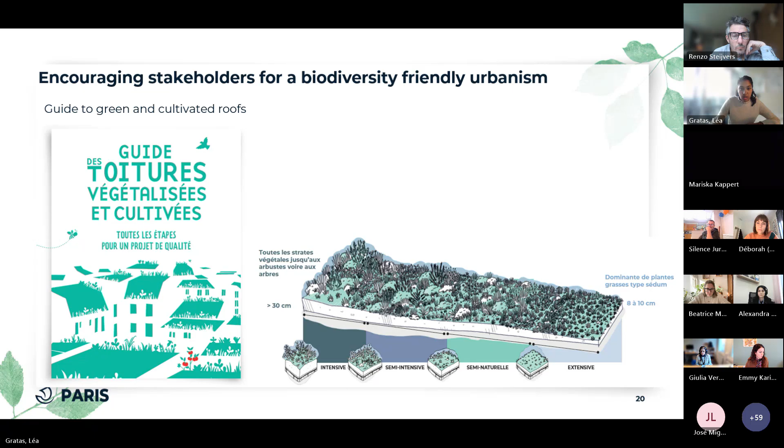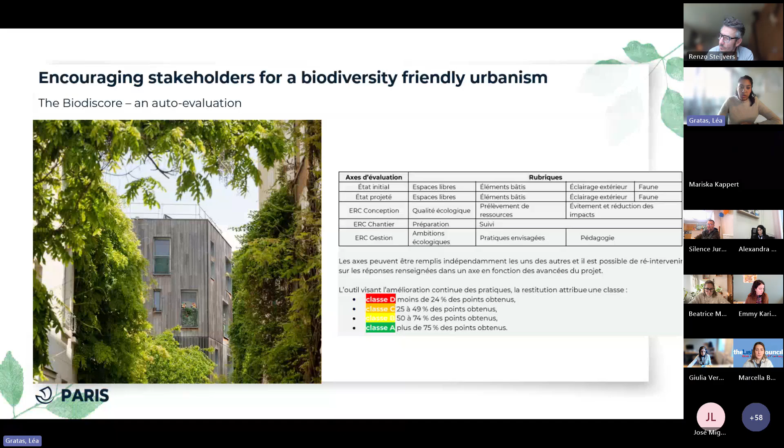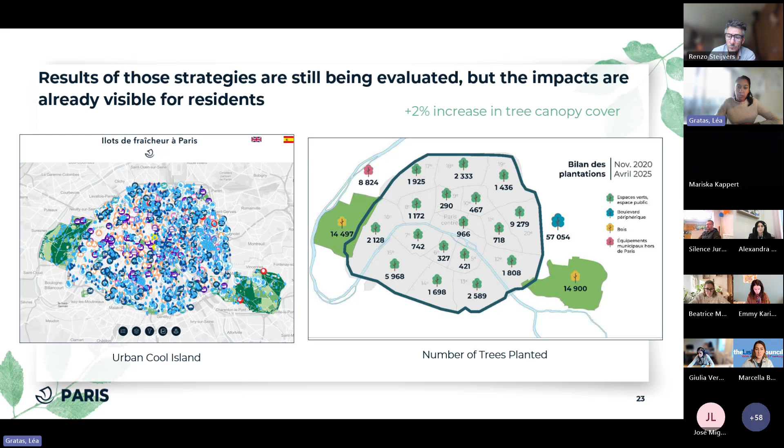And we can already observe results. So here are two maps. The first one is the map of the cool islands. And what is really impressive is that the cool island places are growing massively, significantly. And the other map here is not very striking, but we planted more than 100,000 trees within 6 years, which has a major impact in the city, and we managed to increase our urban canopy by 2%.

So to conclude, I would say that the framework developed by the City of Paris gave us the tools as an administration to act consistently from small-scale interventions to citywide strategy. And it also reminds us that every stakeholder matters in this process, because the city is a collective and complex creation.

And finally, I'd like to say that the greening of Paris over the past 6 years has been one of the city's most remarkable transformations, and the changes to the landscape and the new way people are using public space are a success. And Paris has never seen so many public space projects ever, and this momentum really continues to reshape the city.

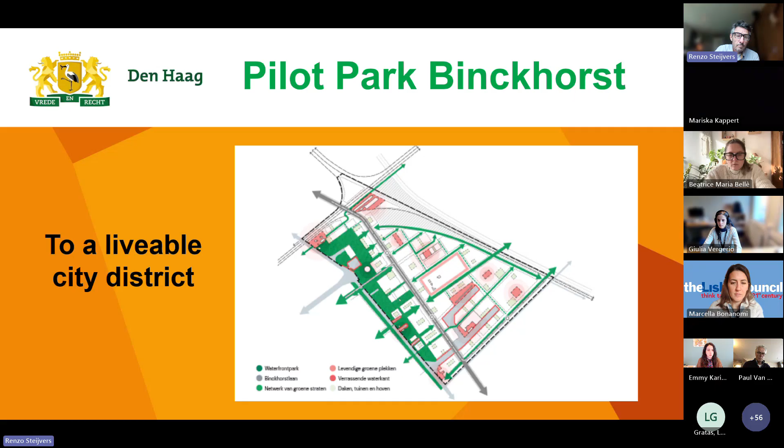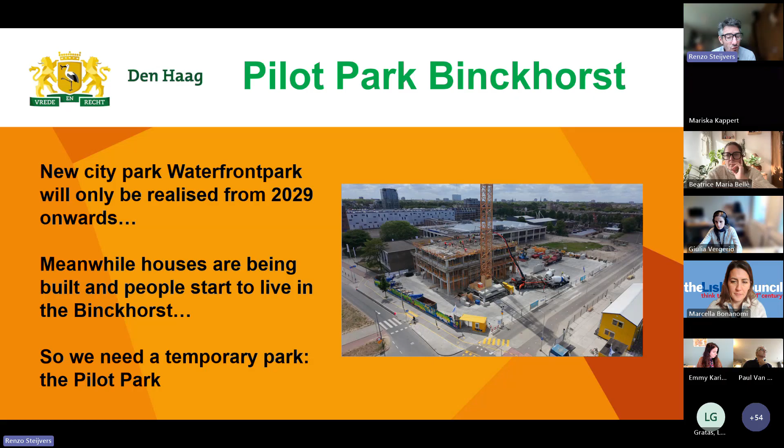The development of the neighborhood is such that the parks are not available yet, but they will be realized from 2029 and further on. But the number of residents is growing, and they want their public space and their green spaces to recreate. So we had to come up with a solution, and that was a temporary park. We call it a pilot park.

So we found this public space in the center of the district, which in the future will be built upon, but now is bare land. And we built a temporary park there. The area was bare. There's not a lot of nature in this district, but in this specific field, there were a lot of different plants, vegetation growing, and lots of insects. But what was missing was that it wasn't a very attractive space to recreate in.

So we wanted to design a space which was attractive to the residents, but also attractive to nature. And we used the Bink 5 as a guideline to design the spaces. Bink 5 are animals which we want to live in these areas, and they are bats, a fish, a butterfly, and some birds. And we used the guidelines that those species need for their environment to design the park.